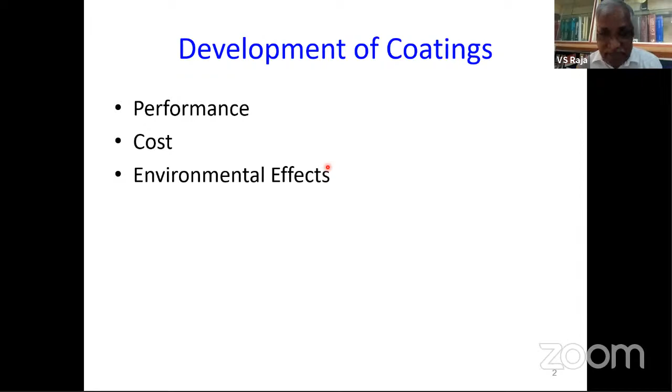For example, Mr. Narayan talked about inhibitors. Chromate is excellent, very cheap, but you can't use it. People talked about using phosphates, and phosphates are having some problems too. So I want to talk about some of these issues, how we evolve over time - coatings having high performance, affordable cost, and also satisfying environmental demand regulations.

Now this has been talked about already, what corrosion is all about. I just want to say that corrosion, when you talk about failure due to chemical environment, need not lead to a loss in structural integrity or any loss in function. As Mr. Narayan talked about, heat transfer will be a problem - tubes are intact, no leak, but there's still a problem like that.

These things are happening because you have material, chemical environment, and design coming into the picture. There are several ways in which you can mitigate corrosion, and coating is only one of the ways of doing it. In fact, coating is one of the predominantly used methods of preventing corrosion because it is very versatile and easy to apply in many cases.

And surface engineering, as we talked about, is creating a synergy between the substrate and the surface. You have wonderful materials with high strength, high creep resistance, all kinds of mechanical properties, but they don't have good corrosion resistance. Coatings have very good corrosion resistance.

An example is glass lining, right? It doesn't have any strength or toughness, but gives excellent corrosion resistance. Applied over a simple steel surface, it can give fantastic properties. So it's a synergy between a substrate and the surface that we modify by various means - something that cannot be offered by either of these two in isolation.

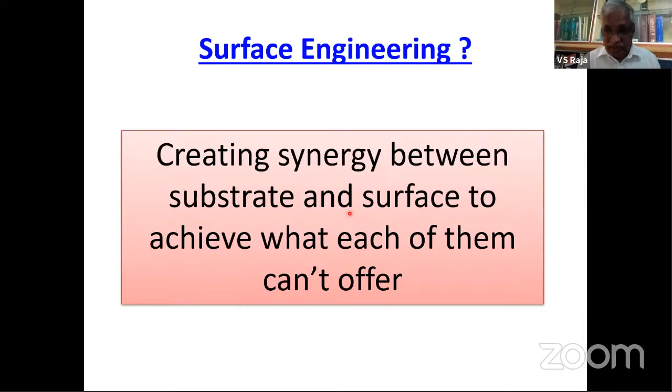And when you talk about corrosion, it is quite diverse - the application is very important. When you talk about an impeller, you need corrosion resistance plus impact resistance; turbines, gears, and so on - these are just a few examples. For example, gas turbines and steam turbines are totally different situations, so the kind of coatings you develop or apply are not going to be the same. They should have different properties.

Now this is a very old slide, so to say, from 2010. I think Alan Matthews, chief editor of Surface and Coatings Technology, summarized nicely all the types of surface engineering technologies available for us. Painting, you see here, is one important part of this, no doubt. Then comes electroplating, zinc coatings, and various other things like surface heat treatment processes - hard facing, pre and post heat treatment processes, anodizing. Several of these constitute surface engineering processes, and many of them synergize the required properties: heat, corrosion, erosion, temperature resistance - various kinds of techniques available for us.

Now we have a range of techniques available to obtain one property which I call the hardness property - one of the important properties whenever we talk about a structure having relative motion with respect to the environment it is handling. So you need high hardness. There's a variety of techniques, we don't have time here to talk about all of them. We can give coating thicknesses in the range of 0.1 micron to millimeters.

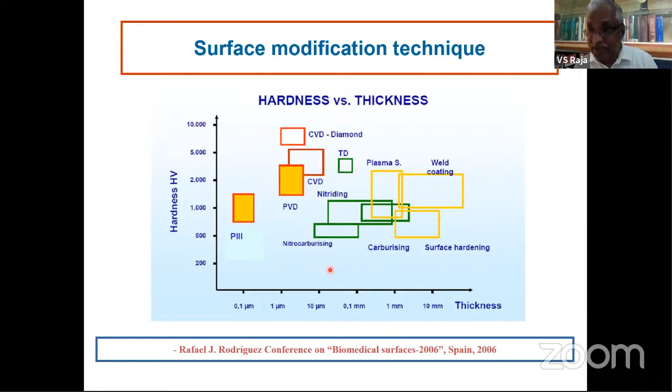Again, as I told you, we don't have time. I'm going to give you some exposure to help you get an idea about the ways and means to achieve better surfaces with corrosion resistance along with other required properties. Plasma nitriding is one technique that is very widely used. I'll give some examples, not much detail, covering one PhD student's work per case, just three slides each, compressing the work. The idea is to give you a feel for how to generate surfaces with better corrosion resistance.

This is plasma nitriding, one PhD student worked with us. Plasma ion immersion technique, another PhD student worked on it. This is for stainless steel. Stainless steels are excellent materials for corrosion resistance, right? But they're soft materials. Where, for example, you're going to use a wall in flow lines, you may not be happy with just corrosion resistance. You need higher hardness, higher erosion resistance. It's very important. How to do that?

You use this technique. Again, we don't have much time. You can implant nitrogen into the material, like carburizing, for example. You can have nitriding processes. You can increase the hardness very significantly, starting from 250 hardness to about 2000 hardness. You see, this hardness can be significantly improved by putting nitrogen in that.

But there are some issues that we, as engineers, should be aware of. As you keep increasing the hardness, you might compromise on corrosion resistance. So that means you need to optimize the treatment processes so that you're not going to lose corrosion resistance, but rather increase corrosion resistance and also increase the hardness properties.

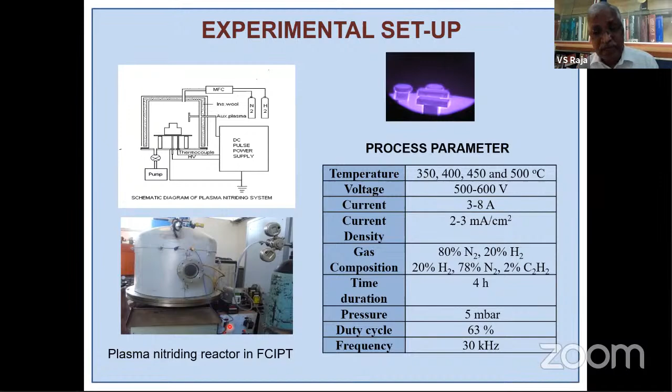That technique is available at the Plasma Institute in Gujarat. In fact, it has been helping aerospace industries, oil and gas industries, thermal industries, nuclear industries, for example, to a large extent, converting the surface into a hard surface with corrosion resistance.

It's possible, but again we need to go into details about understanding the phase transformations - whether nitrogen is in solid solution, or forming carbides and nitrides, all kinds of stuff. If you don't do this properly, it can be disastrous - you can get nitride formation, you can get pitting. So you need to optimize it, study it in detail, and get the optimized properties.

So that is about stainless steels. Now we look at other materials. Just now, I think probably Mr...

Pandey was talking about titanium, aluminum, magnesium. These are very good materials, but they're very soft. How do I improve the hardness properties of this? If you do this technique, the hardness of the surface can be as good as boron nitride. And boron nitride is one of the hardest things, very close to diamond.

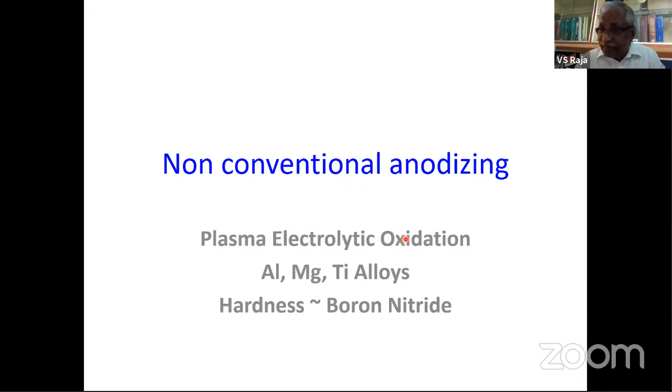So that is about surface conversion coatings. Let me go to some examples of metallic coatings. We all know about hot dip galvanizing, right? Very well-known thing. People talk about pure zinc. And pure zinc coating is not really pure. It has about 1% aluminum in it, added for various metallurgical reasons. And this is very widely used.

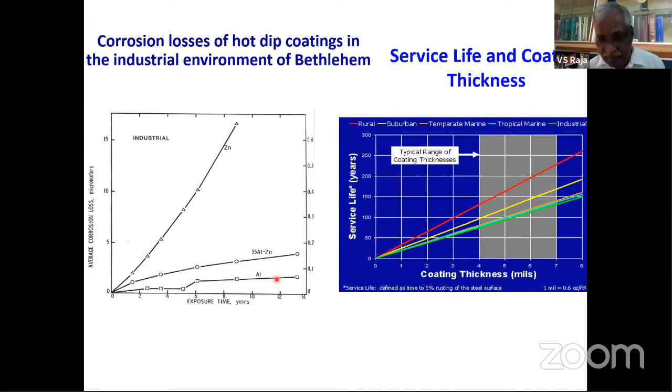What we have done in our own lab, with a PhD student - it has now been patented, and we are transferring this technology to Tata Steel soon - is to develop an alloy wherein you add just about 0.028% of an element. Only that much, and you can bring down the corrosion so significantly. I'm giving you a simple diagram to appreciate it: this is for pure zinc, this is the normal hot dip galvanizing coating, and alloy A, alloy B are coatings with only 0.028% element added.

Look at this - 168 hours, rusting here. Now at 552 hours, no rusting taking place. Look at the kind of increase. Not only 552, look at this, it has reached almost 1056 hours, and you don't see much increase in the corrosion of these coatings. So you can simply tweak it by adding a small element.

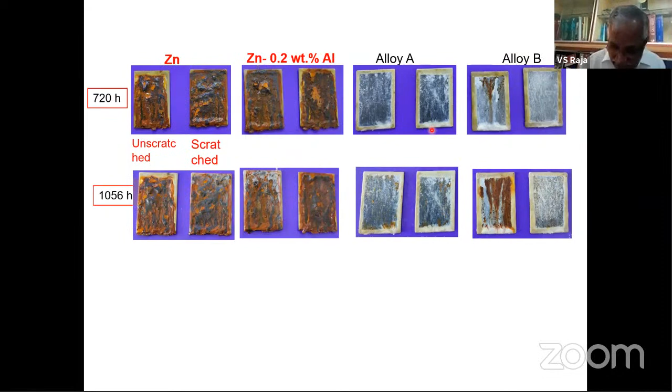How does it happen? These are the kind of visual pictures you see here, but looking at them in the microscope, you see a significant change in terms of the microstructure in these alloys. This is what we call grain size refinement taking place, and this refinement has given enormous resistance to corrosion. That means for the same thickness of coating, the life is increased by 5 times, 6 times - a wonderful thing to save resources and get better properties.

These coatings don't just protect, they give you a mirror-like finish. The appearance is really wonderful actually.

And again, the grain size, I'm going to skip that since time is going to be short.

Let me now come to a topic very close to many of you: paint coatings. The paint coating is one of the problematic coatings, but of course very versatile. I don't think there's any coating as versatile as a paint coating, and it's easy to apply.

But over time, a lot of legislation has changed this. In the olden days, people talked about chromating, then phosphating came in. Now even phosphating is being replaced. That means we talk about primer coatings where you don't want chromates or phosphates, so people look at silane-based coatings.

We have done this work with Faraz Gaonkar, a PhD, postdoc candidate in our place. It's an eco-friendly coating, simply silane and silica. Silica is as friendly as possible because you have a lot of sand, so it's environmentally friendly. Of course, you need to modify it with various kinds of ingredients, and you can add more.

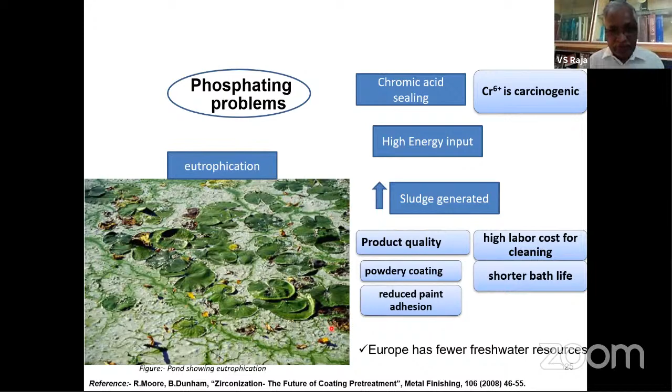One of the things we talk about is you can never forget science. We look at elements close in properties to phosphate or chromate, like titanium, niobium, zirconium, lanthanum, and so on. We look at incorporating these oxides into the paint systems to see whether we can improve this property.

This is one of the works we have done, done for the automobile industry, because the automobile industry is one of the polluting industries, and in fact one of the real problems in terms of pollution compared to other industries.

So for silane coatings, again, we can look at various types of silanes, their stability, their ability to hydrolyze, temperature resistance, all kinds of stuff. Again, these silane coatings can sometimes crack.

You add some nanoparticles, you add some cerium, because cerium gives you something like an intelligent element to reduce corrosion whenever a crack occurs. These are very, very thin, transparent coatings, and we can add various kinds of additives to improve their performance.

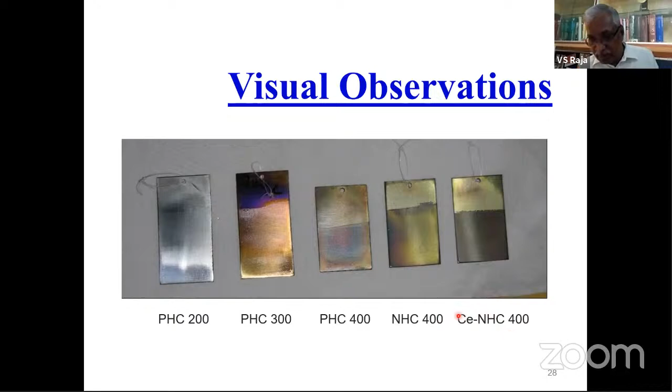Again, look at the visual observations, it's like a lacquer. You can have a transparent coating, and then you can have excellent corrosion resistance.

Again, excuse me, I'm not going into details, no time. I'm just trying to illustrate how you can develop newer coatings which comply with the environment and also give you better performance.

Now come to paint coating, so-called polymer coatings. I'll give you two examples, then I'll close my talk. We all talk about VOC, that's why we talk about water-based coatings now. Can we really use so-called polymer coatings and try to avoid VOC, volatile organic compounds? How much can you eliminate physically?

This is one of the works of our PhD student, done as part of naval work with a DRDO laboratory. This basically utilizes low density polyethylene, and Ms. Batra will know that low density polyethylene is very good, but it cannot bond so well because it doesn't have a polar group.

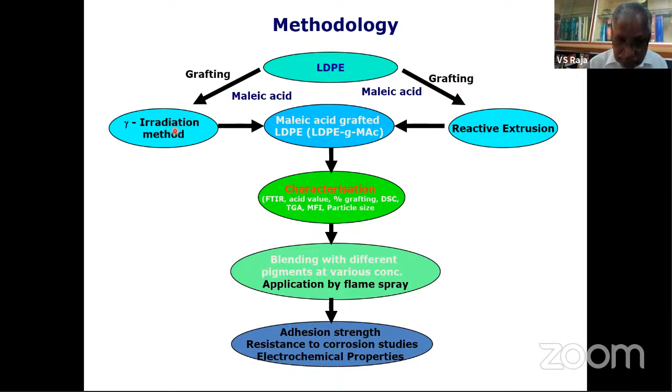We need to understand the molecule. What really happens when you graft it, as the anhydride goes into the molecule, is there's a change in the hydroxyl group taking place. You can reconfirm this by looking at the acid values. LDPE is 0.6, LDPE maleic acid grafted is 8.9. So there is a component of maleic acid being grafted into the polymer molecule.

Now again, when you do a thermal spray, it should not decompose, right? If it decomposes, everything is gone. So you look at the IR spectrum, before and after, and see they're looking good, not much of a problem, no decomposition. Of course we need to optimize the temperatures, optimize everything, otherwise you can burn it. So we need to optimize the process conditions so that it just melts and forms the coating.

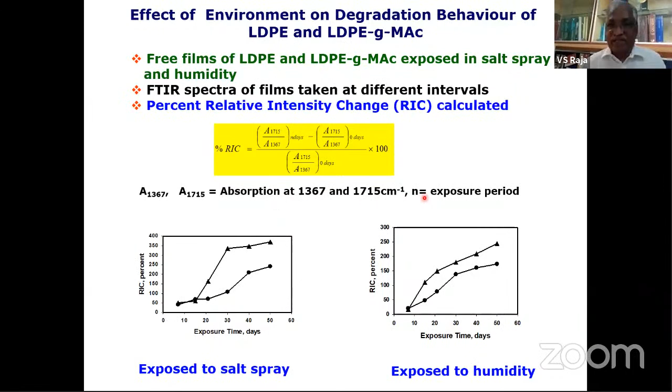It's not just enough to develop a molecule, you need to look at the characterization. For example, you have a polymer, how does it resist corrosion? It doesn't allow water permeation, so we look at how much water is getting permeated into the system. You can use various techniques, one is IR spectroscopy, we use impedance spectroscopy to determine the amount of water. We also follow these peaks, which indicate to what extent the polymer is getting degraded with time.

Of course, this has been added with what you call red oxide, pigments are being added to this particular coating. Into that, again, you can determine the amount of water that is getting permeated.

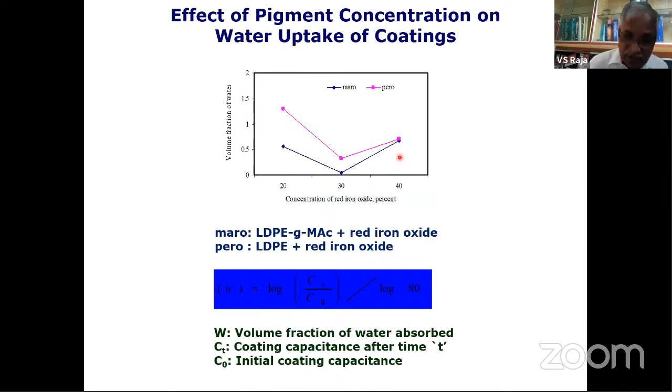We can do this kind of thing. You can see, in fact it's very interesting, the water permeation in this coating changes with the pigment concentration. At a certain concentration, the water permeation becomes the least. As you increase it further, there's science behind it in terms of how the pigment itself becomes a path for channeling. Up to a certain level it becomes a block, and beyond that, they themselves form a continuous path for the water to flow into the coating.

So this is the proof of the pudding is in eating. Then you look at these coatings, put them to salt spray and see what happens, and look at the blister formation in a salt fog test.

We have various kinds of pigments, titanium dioxide, MiO, you can use aluminum. Various types of pigments are being added to determine the performance of these coatings.

This is in terms of scale. These are all published, and I can share the data with you. You can go through them very leisurely.

Very interesting thing is that the kind of pigment that you add plays an important role. I think one of the distinguished panel members talked about nano, right? These nano pigments are very important.

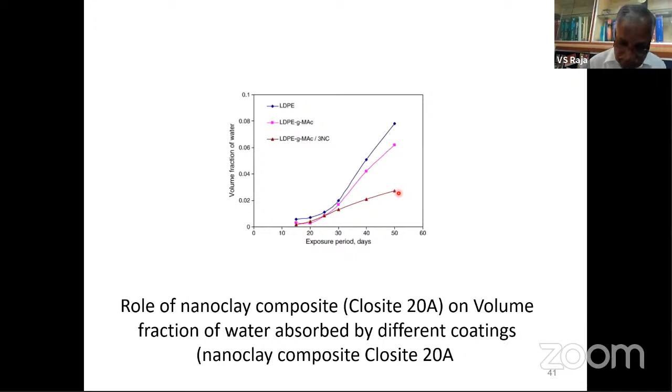And this has now been proven. This coating has been applied and shown, and we have also published it. So this is a technology developed in India for Indian applications, and it's an eco-friendly coating, and very economical as well.

I have two more topics. I think let the chairman please let me know when I need to finish it. Give me just 5 minutes time, so that I can wind up my talk.

It is very important that we understand the molecule and try to tweak it so that you get the required properties. I give an example. This is the PhD work of Rasmi David, my student. She's finished her PhD and is working now.

Now, Mr. Badr was talking about the 1980s or 90s, when people talked about epoxy-based coatings. Epoxy coatings are wonderful coatings. But one of the problems with typical epoxy coatings is that they are brittle. The toughness of these coatings is not very high.

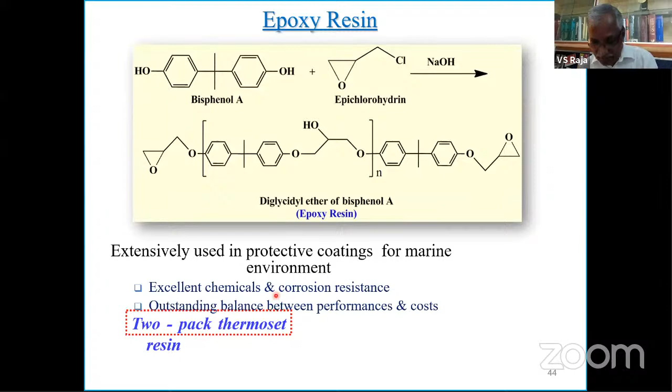I don't think I need to talk about the importance of the coatings, how they're applied. They're applied by two-pack resin processes. I will not go into details about this. Let me just go into what our work is and how it fits into multi-requirements.

This is related to submarine applications, underwater applications. Now, when you talk about cases where you talk about splash zone, we talk about cargoes or platforms, and we talk about cases where constant impingement is taking place, the paint has to last its life before it can protect for a longer time.

So it is necessary to have corrosion resistance, necessary to have chemical resistance. It is important to have mechanical resistance, especially toughness. And the epoxy coatings are not known for that. So how do you really modify this? The epoxy has a very strong cross-linking, right? When you have more cross-linking, it's very rigid, no doubt about it. It's not tough. So how to do that?

You just get into the fundamental aspect of it. We borrowed something from the aerospace industry where people use polysulfide, right? Polysulfide, a linear chain polysulfide, is used. It's an elastomer, for example, right? It is used as a gasket and so on. So can we incorporate this polysulfide into the epoxy? Can we incorporate carboxylic terminated polyethylene glycol adipate?

Now we synthesize this particular CPAE. We synthesize again carboxylic terminated polyethylene glycol succinate. We synthesize these compounds and then we cross-link them along with the normal epoxy.

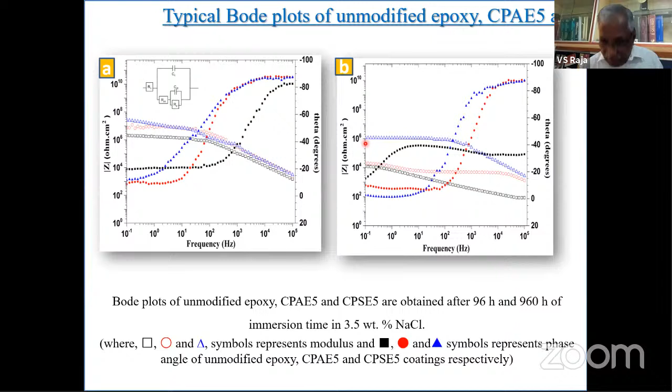So again, these are the plots of unmodified epoxy versus modified with these two things. Please look at this after about 1,000 hours of exposure, you still have 10 power 6 impedance. That means it's really good, and the performance here is certainly very good, no problem in terms of corrosion resistance.

So among all these coatings, succinic acid has given us better properties than this.

Now these are the data with respect to elongation. Please see here, the elongation of these particular polymers - these are all freestanding films of epoxies. Look at this, the elongation to break and tensile strength. Now you see this elongation to break, this is the modified polymer. Look at this here - the elongation has increased from 87% to 168%. That means it's having really good toughness compared to neat epoxies.

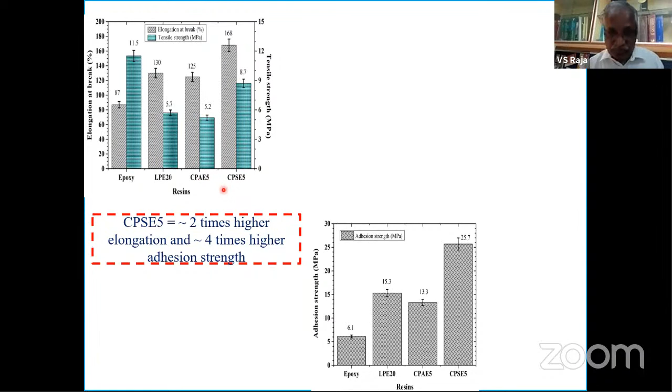I just want to touch upon this last point if time permits. When we talk about coatings, many times we talk about coatings for ambient temperature applications, or elevated temperature applications - elevated meaning around 200 degrees or so. But there are temperatures like gas turbine applications - a whole lot of technology, in fact highly advanced, for developing coatings for gas turbine engines. These are very important because the efficiency of these engines depends upon the operating temperature. If temperature goes up, there's a creep problem, oxidation problem, and so on.

But these coatings are developed by plasma spray and electron beam processes. Each of them have advantages. I have about 3 to 4 students working on this, but I'll just give you one slide to show how important it is to develop a technology that will have better performance.

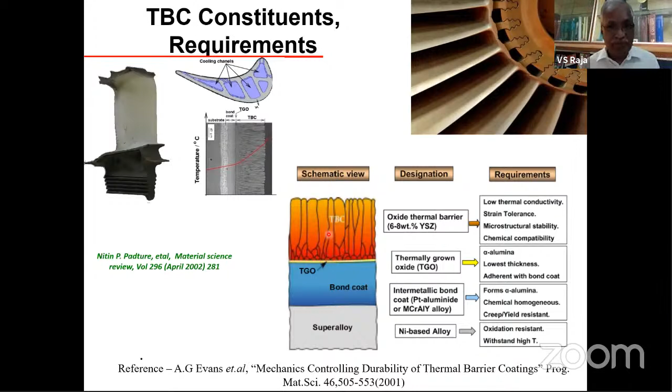We worked with ARCI Hyderabad to modify some of the coatings. It is called solution precursor plasma coatings, for example, that gives better strain tolerance, better resistance against oxidation, sulfidation, hot corrosion, and so on. This is a big topic by itself, but all I'm trying to say is that the sky is the limit. You just have to apply the technology to develop coatings and surfaces with far-reaching properties.

So I think I need to thank and acknowledge many of the students here. Several of them are not listed, mostly we've only given PhD students who contributed to this. There are several funding agencies; the main funding agency was the Department of Science and Technology.

So with this, I would like to end my talk. Again, I would like to thank the organizers for the kind invitation. I do hope this lecture gives you some exposure to the diverse coatings and technologies available to solve the myriad problems various components face in real life situations. Thank you again. If you have any questions, I'll be happy to answer. Thank you.

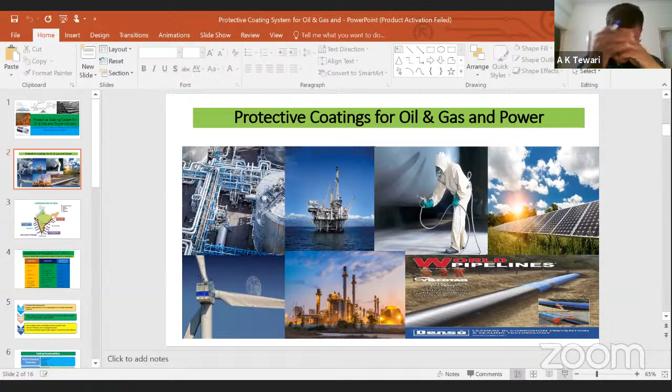So in between lies the entire country, and definitely a coating has a very important role to play for prevention of corrosion, because it's a barrier between substrate and a harsh environment. If the coating is effective, large scale prevention of corrosion can be affected in our industry, particularly when we are talking of oil and gas and power. Both are crucial infrastructure industries. Their reliability, their sustainability, and the consequence of their losses and failures are very high. That's why it assumes greater significance too.

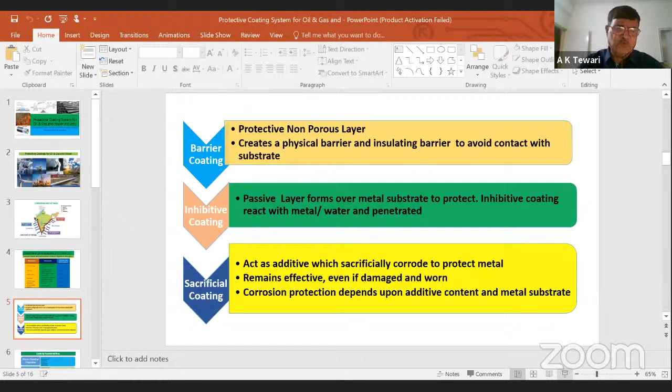Certain sacrificial type coatings like thermal spray coatings are becoming very common. In fact, in my coastal areas, particularly the eastern portion of the coast like Paradip, we have gone for aluminum thermal spray coating for our tank roofs, because tankages storing crude oil or petroleum products for transportation and distribution throughout the country, in a coastal area, definitely need corrosion prevention as a vital concern. A lot of changes and improvements have taken place, but it's still an area of challenge.

Here we talk of the functionality - physiochemical properties, you all know that: corrosion protection by thermal, self-healing, anti-fouling, fire resistant, and all those things. Fire resistant has very limited application, but we do have it in case of LPG tankages, where fire could be retarded for a certain period of time through mechanical properties. And mechanical properties are very clear to everyone - wear resistance, abrasion - these are the qualities we look for in the coating, including its hardness.

And of course, insulating and conducting coating, because in a pipeline scenario - a cross country pipeline distributing petroleum product throughout the country - our country presently has about 48,000 kilometers of pipeline, and the industry is continuously expanding, particularly for the gas based economy.

We are constructing the pipeline, and within a 3 year period we will be touching about 80,000 kilometers of cross country oil and gas piggable pipeline. There are so many other flow lines and jetty lines which I'm not counting. A lot of changes have taken place. Initially when we started our career, it was CTE coating, which was not a very good coating. Over time we got FBE coating, 3-layer polyethylene coating, and other coating materials much better than that. So these are continuously evolving processes, and the cost and economy aspect also matters a lot.

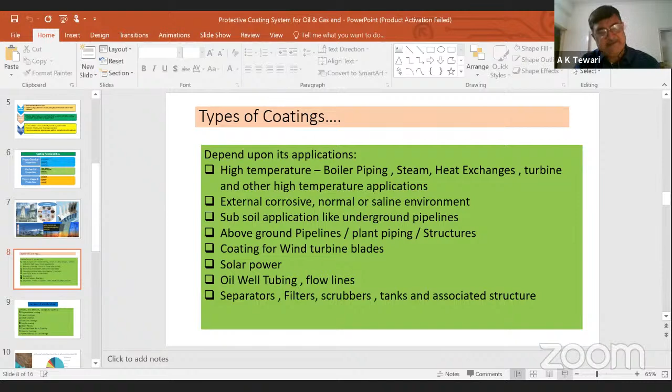We classify various types of coating - I'm talking to experts, so I'm not going into details, just indicating what types possibly we come across, like metallic, non-metallic, and composite, which is also coming in a big way. Polyurethane, epoxy, alkyd, zinc-rich, acrylic, other thermal spray coating - this is assuming greater significance particularly for coastal line area tankages, roofs and other structures, but it's very costly, of course. I'm sure over time the cost will come down with innovative efforts being made. Ceramic coating is a very hard coating, possibly required for applications like blades that continuously face air resistance or dynamic wear properties. Nanomaterial based coatings are the new supplement, finding their place in society.

Don't worry, Sudhanshu, I'll be completing as per the time allotted to me. I will not be exceeding the time limit.

Anti-corrosion coating, when we talk of coating, is not limited to oil and gas and power sector - it is an entire domain of activity. A couple of years back, I was the National Corrosion Council of India chairperson. I organized a seminar on corrosion at Bhubaneswar, inaugurated by the then Petroleum Minister, where the entire industry participated - automobiles, paint manufacturers, shipping industry, government sectors, defense industry, aerospace industry, apart from oil and gas and power. Everybody participated and expressed concern about the kind of problems they are facing with corrosion and what type of coating they are looking for.

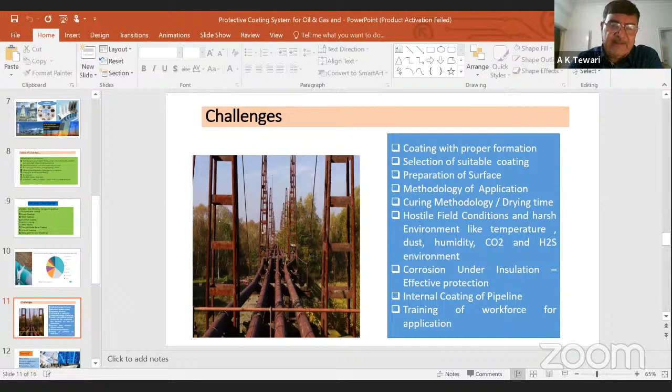As a person, as a user, what will I be desiring? I'll be desiring the durability of the coating. I'll want ease of application. In case it is unwantedly damaged, how should it be quickly repaired? What should be the reliability of that - wear, erosion, cavitation resistance, and all those things?

What's going to be the long-term performance? Suppose it is meant for some insulation - whether the insulation value is going to sustain in the long term or not. What's going to be the efficiency of that? And above all, what is the cost effectiveness? If it is prohibitively costly, possibly people will be a little hesitant to go for that. So the industry needs to debate and work out such things.

While there is an immense potential of coatings in almost every arena of the oil, gas and power industry, these are the desired parameters and the wish list that the industry wants. Definitely the paint manufacturers, coating manufacturers and applicators are all required to be sensitive about that. There are so many emerging trends, like self-healing coating - we talked a lot about that.

So far we have not utilized anti-fouling coating, anti-microbial coatings. Partly we have utilized super hydrophobic, oleophobic coatings, like water resistant and oil resistant - we are using it. Biologically active coating, to some extent, is okay, we are using it. Self-cleaning coating, like you have on a solar panel or something like that.

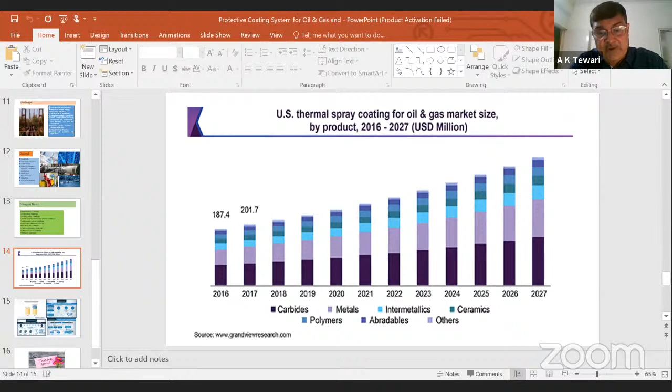This indicates a huge market, say about 148 billion market by 2027. Somewhere it indicates more than 5.7 CAGR, compounded annual growth rate, are expected in the field of coating and all those things. So this is a developing and growing industry, and we need a lot of research in this particular area.

Under the Make in India initiative, some manufacturers have come for some of the coatings manufacturers in the country, and of course a lot of established manufacturers are also there in India. But these are the items which require continuous innovation.

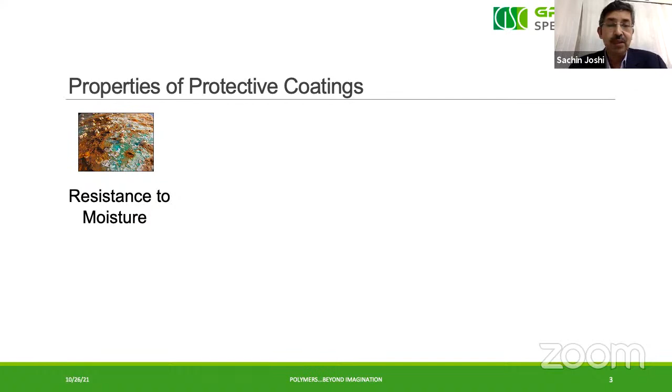Then only it will have the really desired effects. One important property is it should have resistance to moisture. Everybody knows moisture is a very detrimental parameter. Because of moisture, metal corrodes. Because of moisture, concrete leaks. Wood gets damaged, plastic gets deteriorated. So resistance to moisture is a very important and first and foremost property the coating should have.

Second, of course, ultraviolet radiation resistance, because these UV radiations attack the chemical bonds, covalent bonds in the resins and polymers.

The effect is paint chalking, color shade change, loss of gloss, and eventually loss of strength in the polymer film, and then deterioration starts. So UV resistance is a very important property of the coating.

Third, we should have very good chemical resistance, because along with oil and gas industry, there are various industries exposed to chemical atmosphere like acid fumes, alkali fumes, ammonia, chlorine. So resistance to chemicals is very important. The chemical should not attack the polymer film and cause it to deteriorate.

Then there is basically what's called aging and weathering. Various changes happen in the environment - there's change in temperature, change in humidity, then rains, and in various countries there's snow. So a lot of changes happen, and the polymer film should not get affected by these changes. Aging and weathering resistance is very, very important.

Fifth is resistance to scratch and abrasion, because after coating, we load, unload, erect. During maintenance, we use a lot of tools and tackles, we work on the surfaces. So the film should have very good abrasion resistance property, so it should not get scratched and can protect the surface for a longer time.

Then today this is a very important property - resistance to fire. Normally in case of fire, the paint becomes a main ingredient which catches fire and spreads it very fast, and controlling such fires is very, very difficult. So resistance to fire is a very important property the customer is now looking for in the industry.

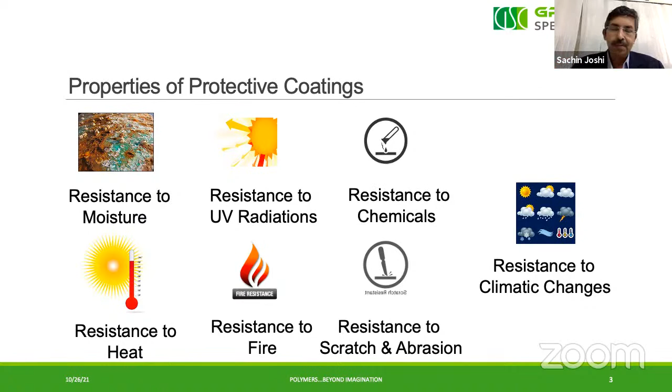So if you really want to develop a coating, or select a coating to protect the substrate, minimum 7 properties are essential, and only then can this coating be a complete solution for enhancement of performance. But the current demand is not just this - current demand is beyond protection, and it is called sustainable green coating.

So what is sustainable green coating? As per the experts and requirements, India is moving towards it, but in developed countries like European and US countries, the ball has already started rolling, because the coating should address 3 important parameters - environmental concerns, economic concerns, and social concerns.

So sustainability has really become a buzzword. Now everybody is talking about sustainability. Let's understand what exactly sustainability means as far as coatings are concerned. In coating, sustainability encompasses four aspects.

Now, the first requirement of sustainable coating - it should have low VOC, non-hazardous. The emissions or evaporants coming out of the system should be safe for humans and for the environment. So it's a low VOC or no VOC requirement.

Second is enhanced performance. Performance is by default - if performance is not there, it's not called a performance protective coating. So performance is by default, but sustainability says the performance should be more than the normal performance given by conventional coating, so the reapplication frequency of coatings can be reduced. So enhanced performance is the second aspect.

Third aspect is enhanced functionality. Along with low VOC and enhanced performance, it should add some value - it should have some functionality so that it has a great effect on the industry, on the end user, and on society as a whole. So some functionality has to be there in the coating for it to fit into sustainability.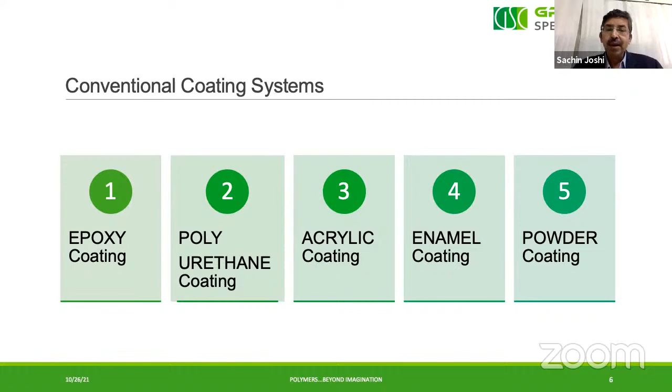But these coatings, unfortunately, don't fit into sustainability, because first of all, they are solvent-based systems, so they emit a lot of hazardous fumes.

So they use a lot of solvents like hydrocarbons, esters, and ketones. These really go into the atmosphere, react with nitrogen oxide, and cause ozone layer depletion. So it's basically a solvent-based system, and they don't fit into sustainability.

Secondly, by way of this chemistry, they are basically homopolymers. Epoxies and polyurethane are homopolymers, and it is not possible for a homopolymer to satisfy all the 7 properties we have discussed. So what happens to achieve the performance? They need to take help of various components.

So a consultant designs a different component system that needs a primer, essentially for adhesion and basic corrosion protection. The intermediate coat, called barrier coat, is important because impermeability to moisture is very important, and that is what MIO is for. MIO is essentially used as a barrier coat, so that by the structure of that MIO, the moisture takes a longer route and takes a lot of time to reach the metal. So the barrier coat is important.

The middle coat is for basic performance, and the top coat is to prevent the system from attack by ultraviolet radiation. So unless all these 4 components are used, we cannot achieve the desired performance. But these 4 coats emit 4 times the solvents into the atmosphere, and that doesn't fit into sustainable coating.

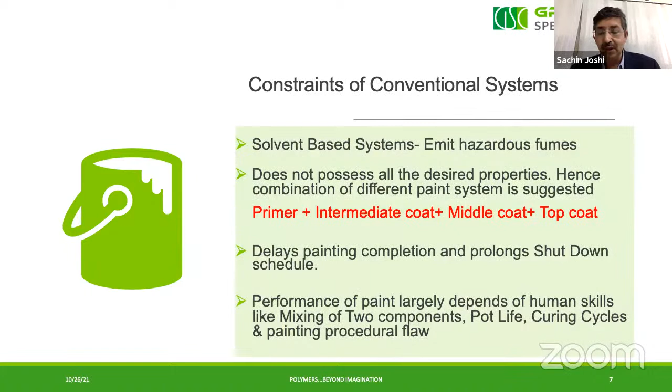One coat of primer, wait for 8 or maybe 10 hours, whatever the case. And because shutdowns are always there, you're in a hurry, painting is last, so you take shortcuts, and there's a lot of problem, and then we blame the paints and coating, which is not working. But what happens is, because the applications are complicated, there's more human skill involved, more human error, and more failures. So these are the constraints of the system.

So Specialty Coating is basically an R&D based company promoted by technocrats in the field of polymer science, doctorates, PhDs in polymer science from UDCT, and we have industry experience of more than 20 years.

And then we have taken this challenge to really give a solution to industry where there is a perfect balance between green coatings and high performance. So we have decided to formulate a system.

Now, the paint system essentially forms with 4 components. One is solvents, which give workability. So during manufacturing of polymer and during application of coating, solvents are important. Secondly, additives and fillers, they give some value addition.

Pigments give the color. And the last and most important component in the entire paint system is the resin or polymer, because the properties of the resin polymer are directly proportional to the performance of coating in the field. So what type of resin polymer you select, develop, or use determines its performance in the field. It is a very important parameter.

So when we design a sustainable coating, we have to work on 3 main pillars. One, the solvent has to be non-hazardous and VOC free. First requirement. Pigment should be RoHS compliant, free from lead, cobalt, and chrome. And the resin should have clean chemistry free from hazardous materials, high performance properties, and minimum wastage.

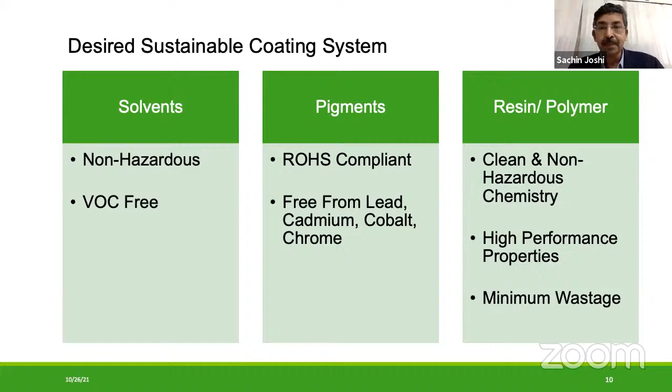So we have to really design a system which can fit into sustainability. And there we have taken the inputs on how to develop this polymer molecule. The first requirement is that the basic polymer molecule should be environmentally friendly and should have zero VOC properties.

Secondly, we should have high performance properties which we discussed. All 7 properties have to be there. Then only can it fit into performance coating.

And the third input we have taken is that the success of coating should not depend on the application. Many times when coating fails, the applicator says there's something wrong in the material, and the manufacturer says, we are a big company, we cannot be wrong, so it's something wrong with the application, and the user suffers.

So we took up a challenge: the coating we developed should not have any clashes between the manufacturer and applicator. So performance should be independent of human skill.

With this in mind, we developed a molecule we call grafted copolymer technology. Unlike epoxies, PUs, and acrylates which are homopolymers, meaning polymer formed by a single repeating unit, that polymer only has the properties of that particular monomer.

Here we have synergized the properties of multiple monomers, so the entire spectrum of high performance properties is included. It is synthesized with a 2-stage process, which is our own development, and we got a patent for the synthesis of this molecule.

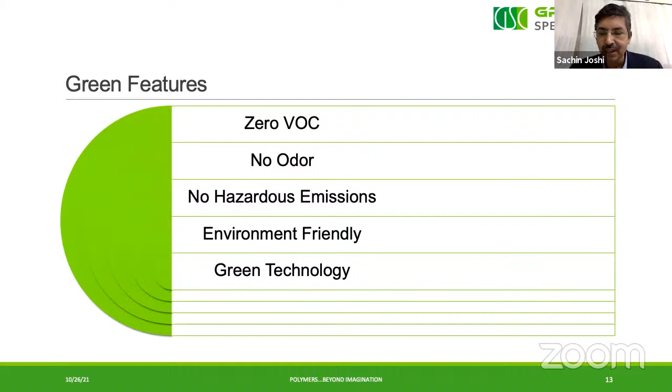The second circle is enhanced performance. Because of grafted copolymer technology, we have almost all the properties - excellent water repellency and lowest water vapor permeability, just 5 grams per square meter in 24 hours, where all other systems are 29 grams per square meter per 24 hours.

This is a very important property, that water vapor will not permeate or penetrate through the polymer film, and that's why it performs successfully, because moisture is the key component that deteriorates the surface - whether metal, concrete, wood, or plastics. So it has excellent water repellency and very low water vapor penetration.

Secondly, UV radiation resistance is very high - no effect of sunlight, no change in performance, no change in color, nothing happens. So it's very good for outdoor applications. It's very tough and abrasion resistant - after coating, you can use it, you can walk on it.

I've seen in Mumbai we have a lot of space problems, people playing cricket in industry on checker plates, trolleys moving around. So it's very tough and abrasion resistant, because the grafting gives very high strength for puncture resistance or tear resistance.

Excellent flexibility, yes, because of expansion and contraction - as temperature increases the substrate expands, as temperature reduces the substrate contracts. This expansion and contraction is not a one-time process, it's 24/7, 365 days. So it shouldn't be that it's good for 3 months and then reducing after 6 months - this technology gives 10 to 15 years retention of properties against all environmental abuses.

So now the last circle. We have achieved sustainability with green features, functional and high performance features, cost effectiveness, and lastly, what value it can add to the industry. So to add value, we have 4 coatings which are creating tremendous value to the industry.

There are 4 products based on this basic polymer chemistry, polymer molecule. One is high performance anti-corrosion coating. Second is complete replacement of hot dip galvanizing with galvanizing coating. Third is thermal barrier coating with under-insulation corrosion protection. And last is heat insulation energy saving coating.

So quickly I'll go through these, and then we can have a question and answer session. Anti-corrosion high performance coating, as I said, we have tested for various properties, 6 properties, and very interestingly, it is tested at just 100 micron thickness.

Now thickness is a parameter of the system, not a parameter of performance, because as suggested, 4 coats with primer, middle coat, top coat, automatically the thickness goes to 300 or 400 microns, and if somebody skips one coat, by naked eye you cannot measure it. So it always has to be measured thickness, and it becomes a parameter of the system.

Now if thickness were a parameter of performance, then you could take wax and put a 4mm layer of wax. Will it perform? No, because wax doesn't have the properties to perform as a protective coating. So what's important is the properties of the polymer coating on the surface. Since this polymer molecule has very high performance properties, thickness is not important in this case. So we have tested all the properties on just 100 microns of dry film thickness.

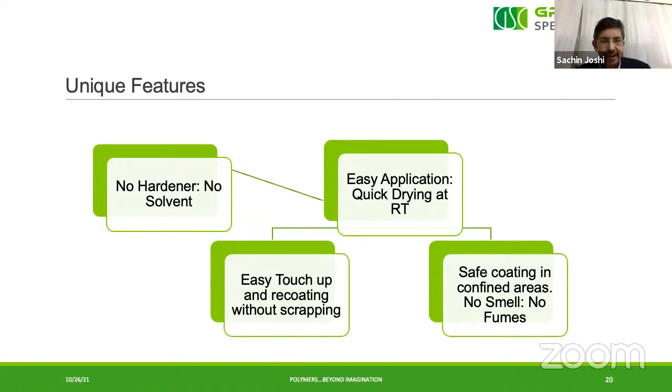So what are the unique features? There is no hardener, no solvent, so absolutely safe. Easy application, quick drying at room temperature. Even at places where humidity level is almost 85-90%, it will still dry fast. Easy touch up and recoating without scraping is very important, and it's a safe coating because there's no smell. So you can coat in confined areas, in pipelines, in tanks, in reactors, in water tanks, whatever - it's very safe to coat.

So what are the benefits? High performance at low DFT, so you save on material. It saves manpower because it's fast drying, you save tremendously on manpower. You save time because of fast drying, you can complete the operation very fast. You save energy because a couple of my customers have stopped using ovens and they are selling carbon credits now because ovens are not required. So all in all, what you save is a tremendous amount of cost.

So these are certain projects executed with this technology. 85% today our product is for export. We are established in Northern Power Grid, United Kingdom. You can see the photo.

This photo, we coated this 3 years back, and adjacent is the normal epoxy coating. You can see the difference after 3 years - even here, not even the gloss has gone.

What are the systems? Epoxy system: 100 microns primer, 100 microns MIO, and 100 microns alkyd epoxy. Time to complete transformer coating is 8 days, so for 8 days your revenue is stopped. When you change to this, only 2 coats, 100 microns, and within 3 days we are handing over the transformer to the power grid. So you can see 5 days of revenue is saved, labor is saved, and there's a lot of cost saving with better performance.

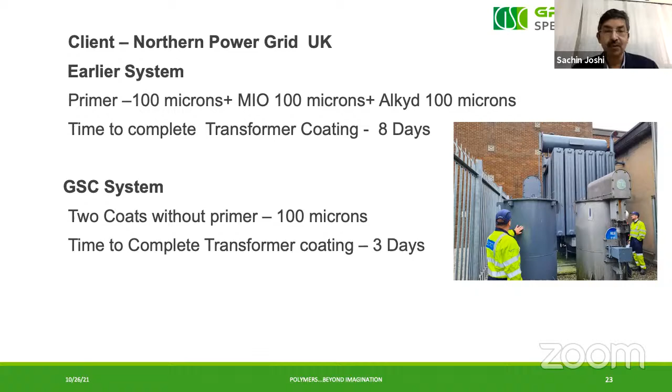We have done Indian Oil Corporation, Bombay - a tank farm top coating. We have done this with only 2 coats of this coating, 100 microns, and still it is going strongly.

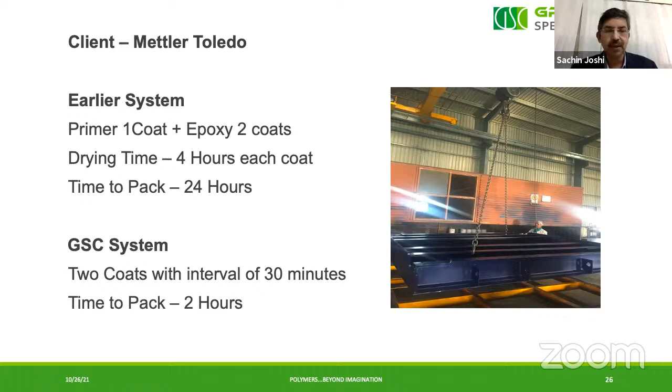Mettler Toledo, a Switzerland-based company - all the metal weighing scales and structures are being coated with this. Earlier it was 1 coat primer, 2 coat epoxy, with drying time of 4 hours each coat, and time to pack was 24 hours, so the entire factory used to be filled with big structures. After switching to only 2 coats of this coating, time to pack is 2 hours. So productivity increased by almost 300%.

We are replacing powder coating. This we have done with Reliance in Jamnagar and Nagothane plant - the entire control panel has been coated with this. There's no 7-tank process, no oven, no electrostatic gun, just a simple compressor, 30 minutes drying, 80 micron thickness, and done. We've done walls, and then we have got fire retardant coatings.

It has very high fire resistance, flame resistance. The flame spread index (FSI) is 5, where the standard says it should be less than 25. Smoke development is 0 - when you take fire to the coated panel, there will not be any smoke, 0 smoke. So it is fire class 1A.

So this covers anti-corrosion. Secondly, quickly, this is a replacement for hot dip galvanizing. Now, hot dip galvanizing is a very hazardous process.

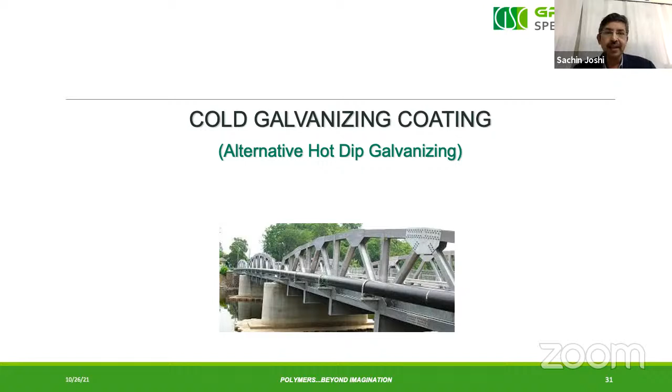You have to dip the coated structures into molten zinc at high temperature, with tin and nickel, producing toxic fumes, not good for the environment, not good for humans. So we have developed a coating which replaces hot dip galvanizing with superior performance.

It is tested at Exova, Singapore for ASTM A123. All properties are tested as per galvanizing properties. It is 30% better than hot dip galvanizing.

Advantage on-site and off-site: you cannot do hot dip galvanizing on-site. If something goes wrong, you use sprays, and that spray is just an eye wash. Here you can do one coat in the factory, a second coat on-site, and protect the surface easily with touch-up, and cost saving up to 40%.

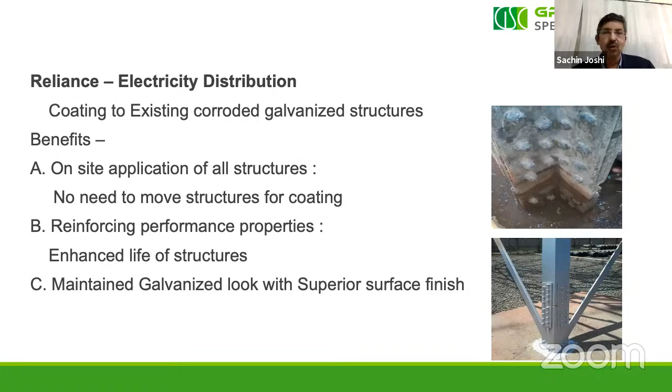So we have done Reliance from Dahanu to Borivali. We have coated all these towers already. Now it's been 4 years. Even today if you go, not even the gloss has gone. For Marshall, we have done the entire factory.

So Sachin, we are just exceeding the time a little bit. Oh, it's done, huh? Yeah.

Okay, fine. So I will skip other products and go to the last point.

So this is a thermal barrier coating which can reduce insulation requirements. It can also prevent corrosion under insulation. You can reduce the insulation thickness. So these are the benefits.

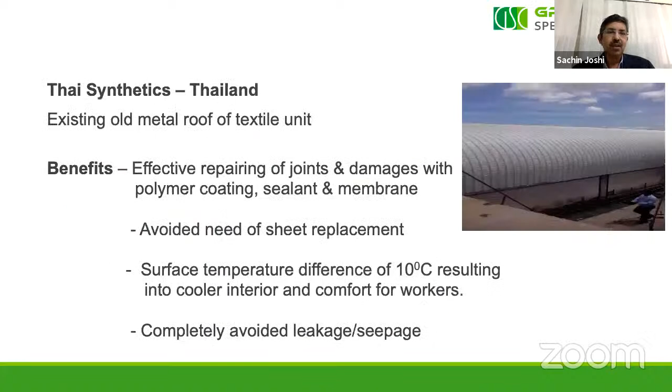Okay, I'll go fast, I'll reach the last thing now. So these are the things we have done. We have done Indian Railway heat insulation coating on cars and everything. We have also done tank farms. So these are the sectors we are working in.

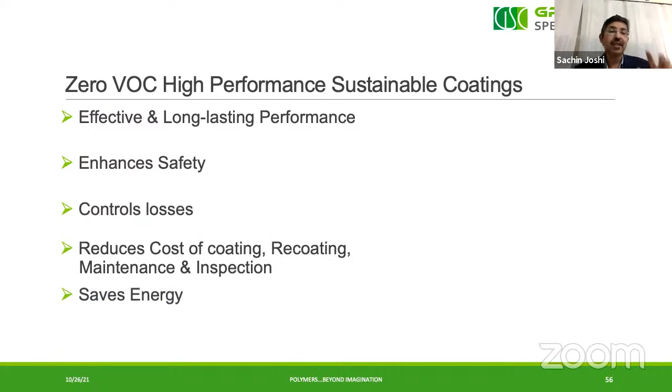So yes, what we achieved is sustainable coatings. It is effective and long-lasting performance, enhances safety because it's water-based. You can store it, you can transport it, no license is required for storage. It controls losses because there's no pot life, reduces cost of coating, recoating, and maintenance inspection, it saves a lot of energy, and it's ROHS compliant.

So sustainability is completely achieved. We have taken care of environment, we have taken care of society, we have taken care of economy. So let's join hands to create a green, safe and reliable working environment.

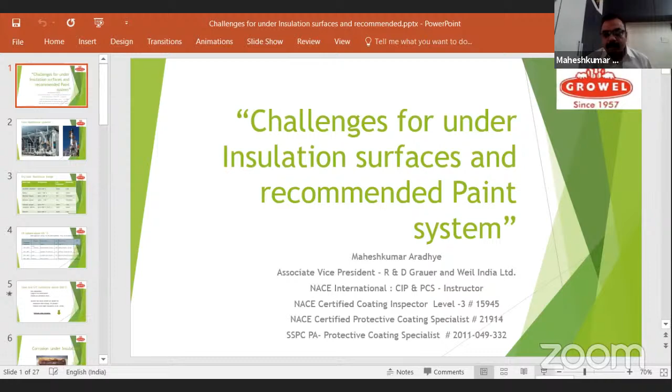Can you come again? I'm not able to show it, only the screen, I'm able to see. You can, in the right hand corner there is a button where you can show the full screen. Right hand corner, next to the bar where it shows minus plus 65%, next to the screen, this is full screen. Not there, go left where minus is written. Next to the minus, there is a full screen button. Yeah, but I'm trying to do that. No, this one, immediately after. Yeah, now. So you can start the presentation. Yeah.

Very good evening to all. My name is Mahesh Kumar Aradhya. I am Associate Vice President, Grauer and Weil India Limited. I'm basically a NACE International CIP and PCS instructor, so I will be giving reference mostly to NACE International standards and working conditions. I'm going to talk about high heat resistance coatings for CUI, corrosion under insulation.

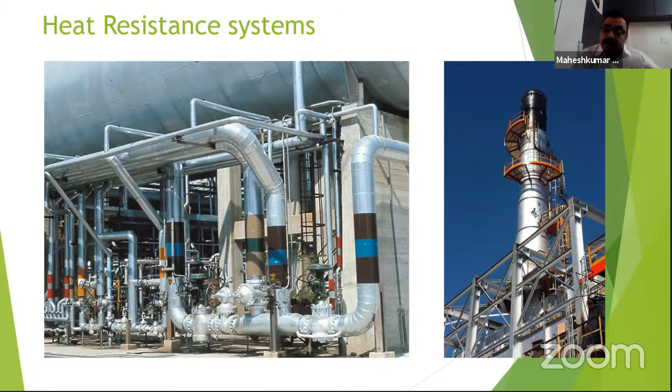What coatings are available at this time in the market are either heat resistant or CUI coatings. The heat resistant coatings can come in various different forms, okay, they can be modified phenolics, epoxies, or phenolic epoxies. They have certain properties which may or may not give you durability. For example, if you take epoxy, it can have a temperature resistance of up to 200 degrees C, I'm saying.

These temperatures we see here - 200, 230, 250, 400, 600 - these are the dry temperature resistance ratings, and that too for a continuous range of temperature. It cannot be a cyclic temperature at all. When it is a fixed temperature range for a longer time span, yes, they definitely work as per the requirements given in the specification.

But what happens with systems above 120 degrees C? In areas like atmospheric zones, uninsulated services, they perform very well - steel onto stainless steel, onto various requirements. DFT requirements in those systems could be from 25 microns to 100 microns.

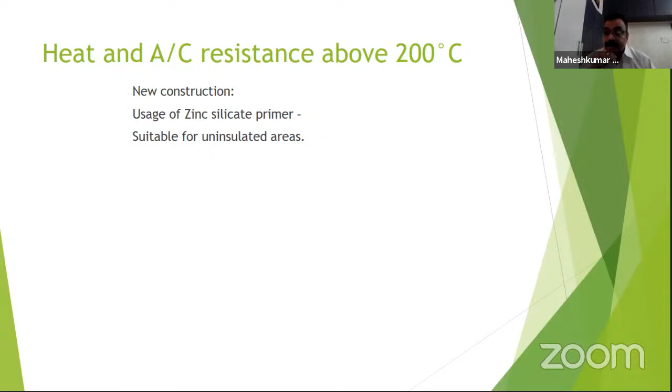So when this happens as you apply it, you get the issue of corrosion under insulation. So what makes that under-insulation area so sensitive to temperature? When it's continuous, absolutely no problem, but when it's a thermal shock, it is very severe. What happens here?

Once the pipeline is heated, it becomes dry. Once the pipeline goes back down in temperature, condensation starts. With condensation, all the moisture sits in the insulated pipeline, and this moisture goes down to the surface.

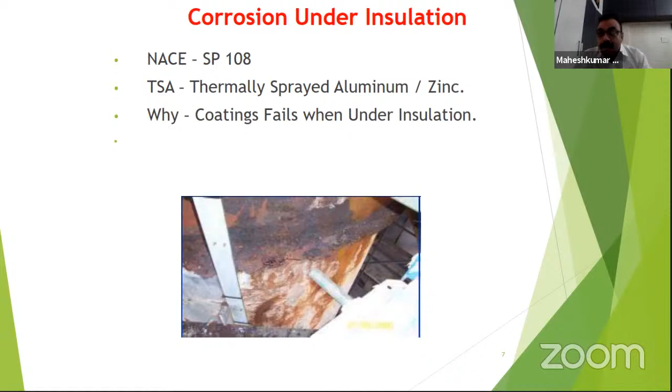The under-insulation area, why do they fail? Let's understand the mechanism. The insulation is just water, okay - water vapor condensation is the water that gets trapped inside at temperature. The temperature gradient is very, very high, thermal cycling is going on, and that's the reason an inert material is needed inside.

So what can be an inert material inside the insulation is you have to use either coupling compounds such as aluminum or zinc. Now this has given grand success as far as CUI is concerned, way back in 1997 with British Petroleum.

Then we had very limited knowledge at that time about the corrosion which is going to take place under insulation. So they thought that we should go with a thin layer of high temperature resistant coatings, then the shock primer, sacrificial zinc happened. But what happened?

The operations which are having thermal cycles, we call it thermal shocks, or you can also call it temperature cycles. Most of the materials have shown failure, such as zinc silicate, organic coatings, silicone coatings.

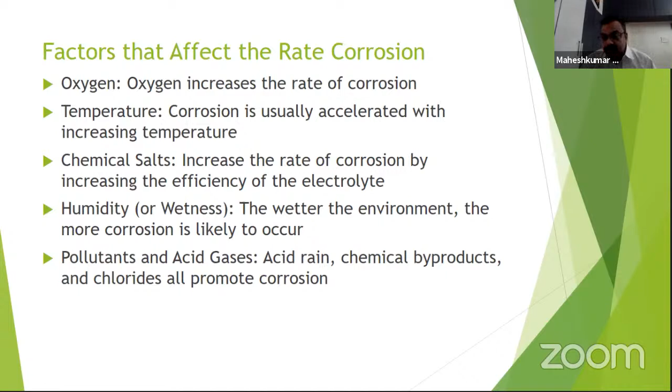So what you need here, as I have explained in the picture, you need a coating which can sustain the temperature as well as move along with the surface. It should have that much tensile flexibility to ensure the compression and contraction of the pipeline.

Now, when this is going to happen, what you need is we must not use hard coatings, such as zinc, organic zinc coatings. You can't even use a surface which is having a galvanized surface. Equipment or material which is galvanized, no way. It is not going to give you that kind of under insulation properties.

Why does it happen? It gives that particular service under cyclic conditions, which can deteriorate the quality of that particular structure. It can go under corrosion issues very fast.

So the second thing, which was there as a challenge, the major problem is the existing situation: need for a wide temperature range. It may be operated at minus 260 degrees, it may be operated at plus 650 degrees C. Need to have a material when using it in maintenance and repair.

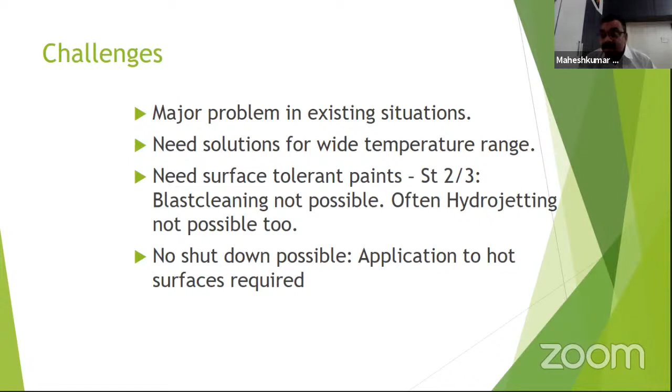So we took this challenge at Grauer and Weil India Limited, and we made a solution as Pentatherm 750. So what we did here,

we started with very different types of polymers mixing together, as Mr. SK, as Mr. Sachin said, how we have made the grafted polymer. Yes, we also made a grafted polymer, and we started working with NACE SP0198-2010.

We tested this polymer up to the 650 degrees C range. We tested this material at 90 degrees C saline solution conditions for 4,000 hours. We have tested for acid and hydrocarbon resistance, and we kept our VOC level below 263.

63 grams per liter. Now, when we made this particular polymer, we chose the other ingredients such as pigmentation, the use of different types of extenders, and some special additives to give proper adhesion at high temperature also. We also ensured that this particular material will have a higher or unlimited overcoating time.

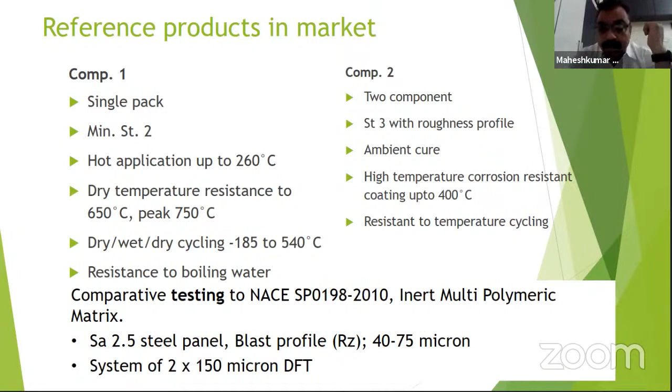So we applied those panels as an inert matrix coating onto various substrates, and we also carried out shell CUI tests. When we did this, we found that there are absolutely no defects in the film as far as the exposure is concerned. Exposure was 16 hours at 204 degrees centigrade max, thermal shocks at 23 degrees centigrade, and then again hot water immersion at 95 degrees C.

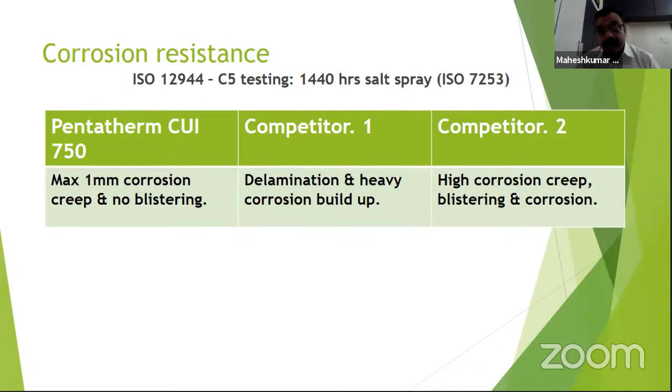It was a repeat cycle of more than 80 cycles. We tested our Pentatherm CUI and found it gives maximum resistance to all the CUI tests as per the shell specification. For corrosion resistance, we found a maximum of 1mm creep. Delamination, which was observed in other coatings, was very high.

We also tried the hot water resistance test at 4,000 hours at 95 degrees C. We almost replaced our water, refilling it more than 600 times, because it was going out of the system.

I don't fully believe this particular test, because most of the time it was showing delamination taking place in both the competitors, with blisters occurring. So I retested it once again in a separate manner, and the results were absolutely the same.

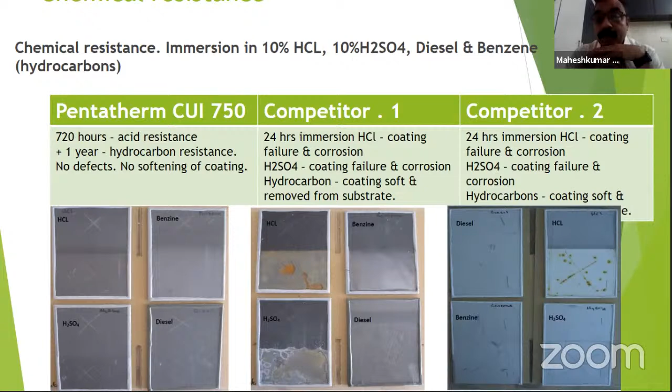Then we tested it for various chemicals, such as 10% hydrochloric acid and 10% sulfuric acid. We found that it gives both hydrocarbon as well as temperature resistance, and acid resistance in that area, with absolutely no issues.

Then there were a few normal tests which are normally carried out at site. We carried these out and found that it meets very high impact resistance, as well as adhesion and hardness. The pencil hardness we found to be more compared to other CUI systems.

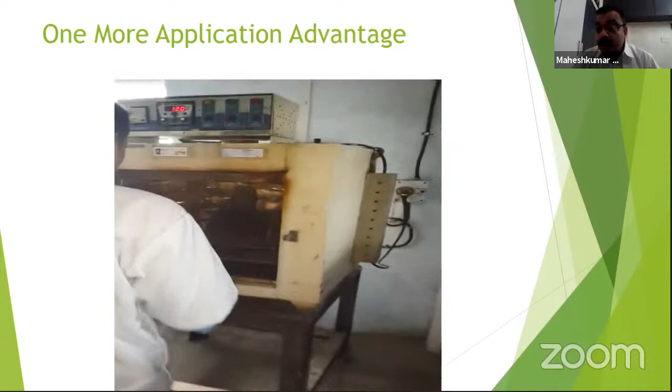Now I want to show you one video, which is going to give you a clear idea. At 120 degrees centigrade, we kept a corroded panel without doing any kind of surface treatment other than ST2, ST3.

You can see the safety precautions that we had taken. At that hot temperature, I took a chance without any PPEs to apply the coating onto the hot surface. This CUI, you can apply it onto surfaces at temperatures up to 100 degrees C easily, at 100 microns.

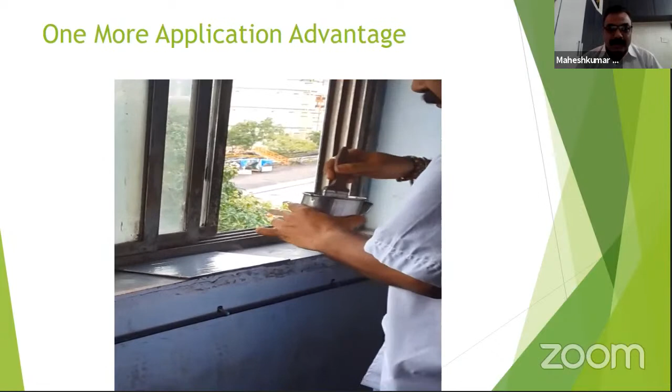You can see some fumes there, but these are not poisonous material. It is the smell of those solvents which are very slow evaporating, very, very slow evaporating.

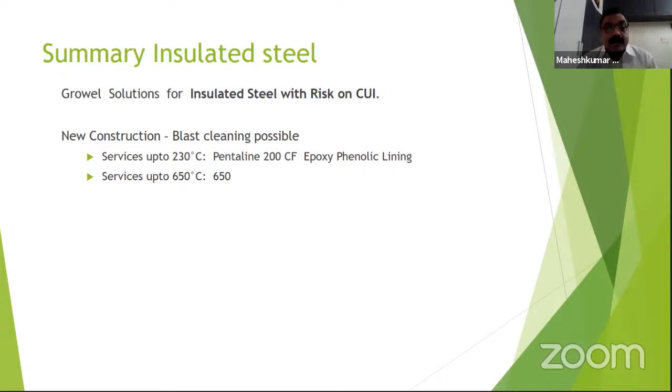All the tests were performed, and what we found is that blast cleaning is possible for service temperatures up to the range achievable with our CUI, that is phenolic linings. For services above this, we have to go only with systems which give a higher degree of corrosion resistance.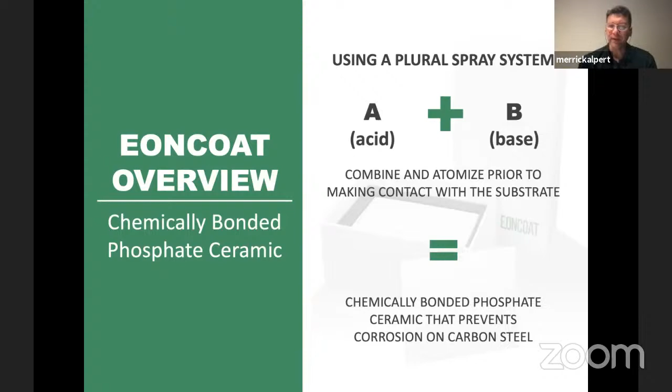Eoncoat comes in two basic formats. The gentleman who just spoke gave a great presentation on CUI and all the dangers and problems of corrosion under insulation. Eoncoat comes in a basic atmospheric form, so you can use it on above ground tanks, above ground pipeline that's not insulated, on offshore platforms. That's what we consider the atmospheric use of the coating. When it's used in that format, we always use a top coat over it.

On the other hand, we have a high temperature formula. It's often used in two scenarios: the first is corrosion under insulation, and the second is as a weldable material. When it's used for corrosion under insulation, or used on the bottom soil-facing side of a tank that's going to be welded on the opposite side, no top coat is used. It's a single coat system. Only the Eoncoat is used.

So again, for purposes of this evening's presentation, we have Eoncoat in the atmospheric form, and then Eoncoat at a high temperature form used in the corrosion under insulation environment and also used in the weldable environment, most often on the bottom soil-facing side of tanks.

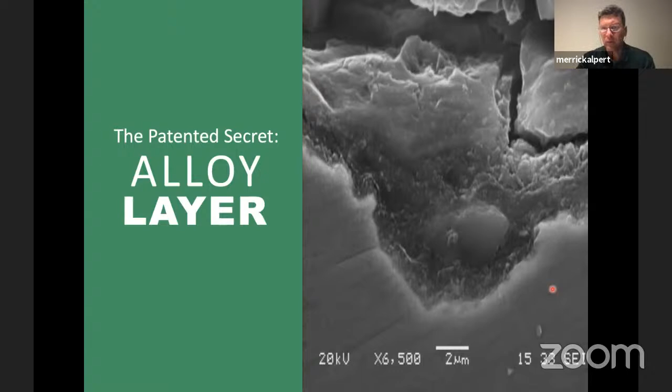Now, what I want to show you here is the same scanning electron microscope photograph, but in this case we're annotating it to emphasize that the root cause of corrosion is that you have a reactive surface. It's occurring because oxygen and moisture can touch that steel and steel will corrode. So what we do with Eoncoat is go right to the root cause of the problem. We passivate the surface of the steel. It can no longer react with the elements. And because oxygen and moisture can't touch the steel, it will not corrode.

This is a different scanning electron microscope photograph, in response to people asking what the passivation layer actually looks like right on the surface of the steel that you've chemically altered to prevent oxygen and moisture from touching it. Again, you can see the steel at the bottom, and up at the top the ceramic. Through a series of chemical and mechanical actions, we actually tore away the ceramic. It took some doing, some time for us to figure out how, but we tore it away, and look what's revealed: the iron magnesium phosphate layer.

That looks like white snow. That is the passivation layer that prevents oxygen and moisture from touching the steel. Paint will never do that because paint is a barrier coating that's mechanically bonding. But with Eoncoat, it is chemically bonding to the steel. It is passivating it, and that is how it prevents corrosion.

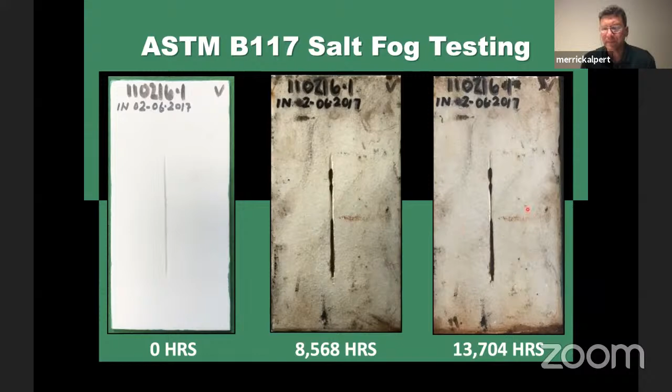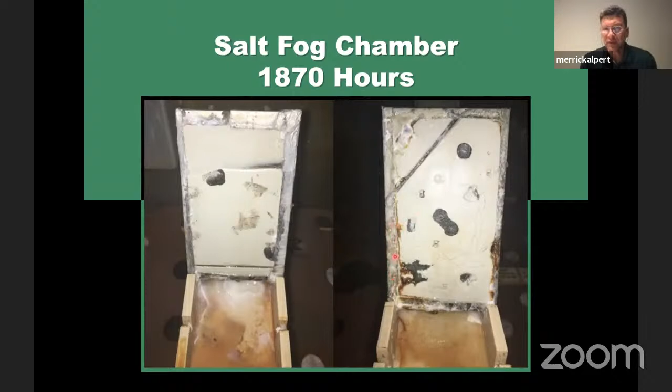Chevron then takes those two side panels and puts them into salt fog for months, 1,870 hours. Same result. Look at that. You see no corrosion. If that was paint, it would be blistered and bubbled and it would all be gone. There's no corrosion. The only corrosion you see is actually just the rust bleed from the uncoated back of the panel.

Now, what I'll do is show you a couple of photographs as we're finishing up, so you can see what it looks like in the real world. This is one of Chevron's tanks. The first thing that should jump out at you is, look at that level of rust on that tank. Look at that flash rust.

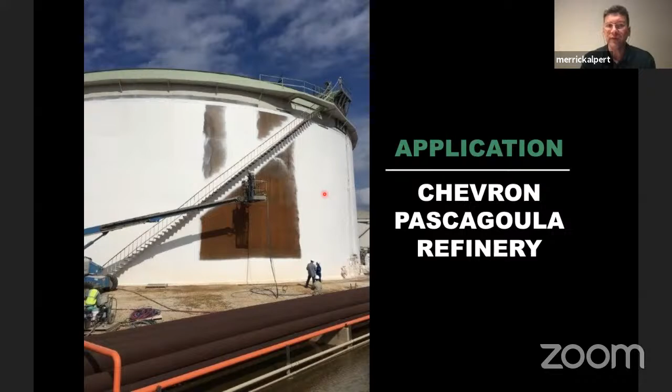With Eoncoat, we actually spray it on flash rusted steel, and there's no issue, because we'll use that flash rust, we'll use that Fe to help create the passivation layer. So notably, that rust on the tank is not our enemy, it's actually our friend, because it's going to help passivate the steel. And then, after it's been spray applied, a top coat goes over it. And if you drove by that tank, on the first day you wouldn't know any difference. But years and years and years later, you would, because this tank will not corrode, but the tanks around it that have regular paint will.

Then what we're looking for in surface preparation is a basic commercial blast, much cheaper, much less expensive, much faster than taking it to white metal and trying to hold the blast. People blast the entire tank or pipeline section or section of offshore platform, and then they apply the coating. We apply 20 to 25 mils, that's about 508 to 635 microns. And then for an atmospheric use, like a tank like this, you would use a top coat. But of course, in the CUI environment, or for the weldable coating, we would not use any top coat. It's a single coat system.

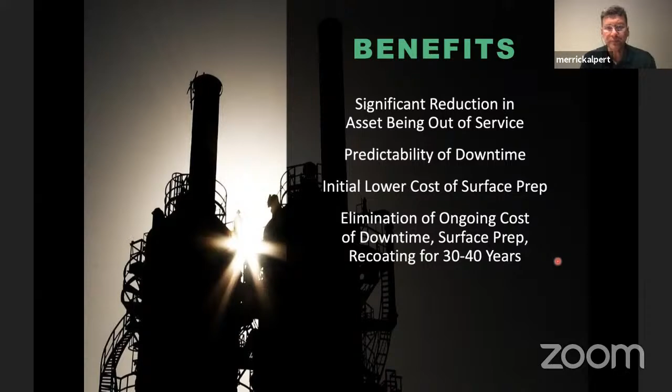Then there's the initial lower cost of surface preparation, because per square meter it's so much cheaper and faster to go to just a commercial blast, not a white metal blast, and not have to worry about corrosion. Finally, there's the elimination of the ongoing cost of downtime and surface preparation. Chevron estimates they will get at least 40 years out of the coating when used in an atmospheric environment.

Now the last slide covers the HSE environments - the health, safety, and environmental benefits. These benefits come because the product is water-based. It is inorganic, made of minerals and water, rocks and water. That's it. It's not toxic. There are no volatile organic compounds.

No volatile organic compounds - not that you have to say it's low, there are none. There are no hazardous air pollutants. It is not flammable - you could not burn it if you wanted to, because it's just rocks and water. And finally, there is no odor, no fumes, no vapor, nothing of the sort. It is rocks and water.

So the product is in use around the world today, and we would be delighted to work with you to protect your assets, whether onshore or offshore, whether atmospheric, CUI, or a weldable environment like a tank bottom. And with that, I would thank you.

I'd be delighted to take any questions that you have. And if you don't wish to ask them now, then by all means, I certainly can answer any of those in a follow-up.

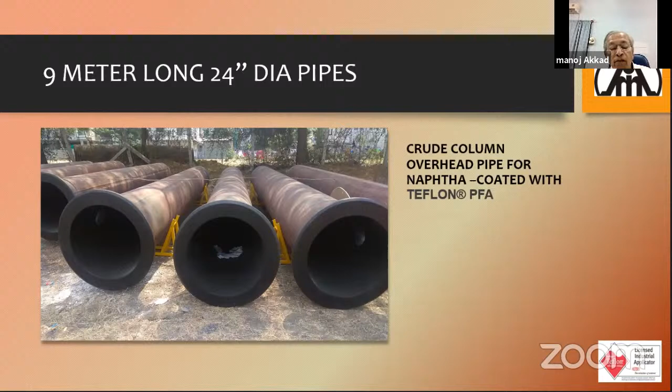These are all meeting unique challenges, and we thank Reliance for initiating this kind of innovative idea, and see where we go with that. We would like to work with other industries also to do the same thing: solve their corrosion problems, reduce the hazards, increase the safety, increase the life of this equipment, and most importantly, increase the uptime, the time between two shutdowns.

And this is how we would like to work with the industry. This has not been done for many years, mainly because this is a very conservative industry where the risks are normally very high - the political risk, the investment risk, etc. But now I think is a time to really go ahead and solve the problems of corrosion. There are plenty of them, and we are ready to work with the industry in the spirit of collaboration and solve them.

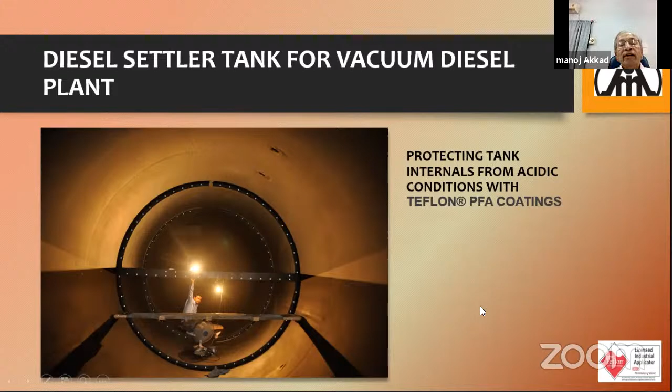Another thing that we talk about in innovation is pushing the envelope, whether it's temperature or size or anything. We know that Teflon coating requires two basic things: one is very good surface preparation, which is a very clean blasted surface without rusting, and second is the oven to bake the equipment.

So when you do a very large piece of equipment, when you start blasting it from one side, by the time you reach the other side, it would already start rusting. So we had to figure out a way of not allowing the surface to rust and keep it virgin, clean, white surface. And that we were able to do.

And the size of the equipment is only a mental block in our mind about whether we can have an oven that size or not. Once we decide that we can do any size, then we can build an oven around it.

So these are the two pieces of equipment which have been coated. Mr. Nagar, can you go to this? Yeah, this is the second one. So we did a total of 5 pieces, starting from 100 tons to 200 tons. So size is really not a limitation anymore - this is pushing the envelope.

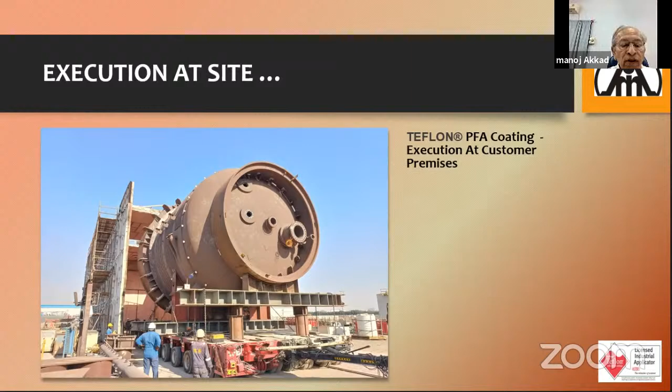As I said, we are asking for collaboration with the industry to push the envelope of technology so we can solve problems. All problems are solvable provided we are willing to work on them.

Next, these are the conventional downstream products application. This is on a spiral conveyor of a PBR plant, which vibrates and pushes the product up from ground level to the second floor.

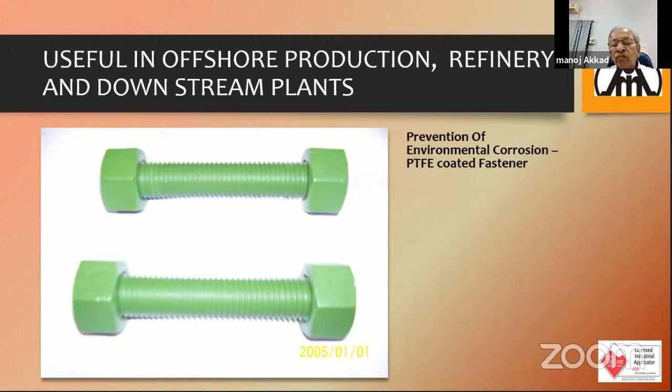This is again a coating on a distributor plate for an HF tower. These are the products which you guys have seen: the nuts and bolts, the fasteners, which are coated with PTFE, used all the way from production wells up to the refinery and the petrochemical plants.

This is one of the earlier equipment that we had coated for GAIL Pata, more than 20 years ago. It's still working, going strong. At that time we didn't have an oven this large, so we constructed an oven around it. This one is about a trailer length; the other ones we've done recently were about 2 or 3 trailer lengths.

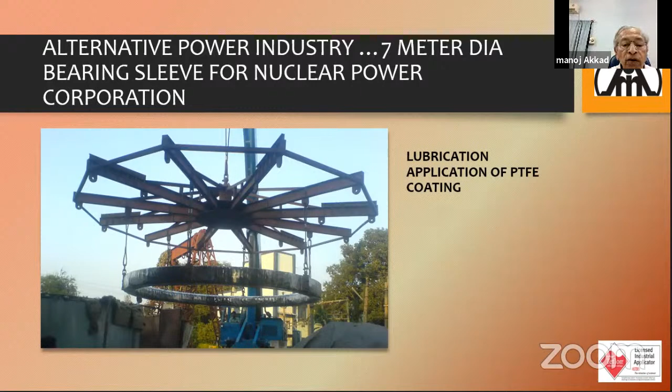If you can see the ring at the bottom, that is part of a bearing, about 7 meters in diameter. The challenge was that since it's part of the bearing, we don't want any distortion of the ring — we want distortion less than 0.1 millimeter over the 7 meter diameter. That also we were able to achieve with proper controls.

Teflon tube heat exchangers, not coated but actual Teflon tubes, are being used in an coal-based power plant in Poland, and they scrub down the SOx gases as well as recover heat from the flue gases. The same thing will be available from us, but in terms of metal tubes.

Again, we thank Mr. Yuan of Reliance Industries for inviting Chemours and Ami Polymers for collaboration on finding solutions to unsolved corrosion problems. I wanted to keep it short, and I believe we haven't taken too much time. Thank you.

If there are any questions, we could answer. Hello, I would now like to invite Mr. Dabral to sum up, and I'm posting the questions in the chat. Mr. Dabral? There are questions, yes. So I just want you to sum up today's discussion, and then we can take it further. There are questions being put forward to the speakers. Thank you so much, my co-panelists, for the discussion. It was really helpful. Some of the technologies you discussed were really wonderful and different from what we see in day-to-day affairs. Let's see what questions we have for each of us. I understand there were some issues with sharing and the platform for the first time, since we are fairly new to this kind of exhibition, but we're getting used to it. Mr. Nagar, if you could post the questions. There was a question for Mr. Alpert — the question is there, but I think he has left.